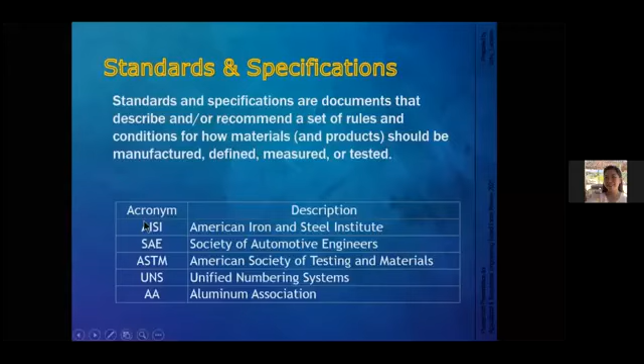Okay, so for the classification of materials, we have already learned that engineering materials can be classified into four types: metals, ceramics, polymers, and composites. The metals are further subdivided into ferrous metals, which means they contain iron, and non-ferrous, which simply means they do not contain iron. For the ceramics, we have crystalline ceramics and glasses. For the polymers, we have thermoplastics, thermosets, and elastomers. Then lastly, the composites, which is simply the combination of the three or any two above, which produces superior properties.

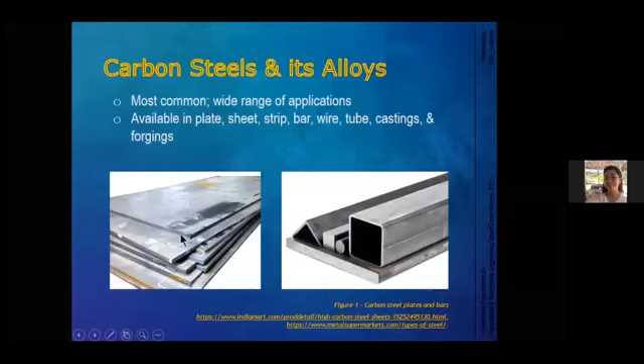Okay, let's talk about the carbon steels and their alloys. Carbon steels and their alloys are the most common and have a wide range of applications. One application, for example, is the body of an automobile; it is a carbon steel metal. Another application is in the construction industry, for example bars, I-beams, or plates. So they're actually the most common. They're available in plate, or sheet if it has a thinner thickness, then strips, bars, wire, tubes, castings, and forgings.

Okay, so what is steel actually? Steel is an alloy. When we say steel, it is a composition of iron and carbon, having a carbon content ranging from 0.15 to 1.7%. Now take note of this range because it actually depends upon the references. Some say it's 0.3, others say the upper value is 2.0 or something. So these are just ranges that depend upon the references.

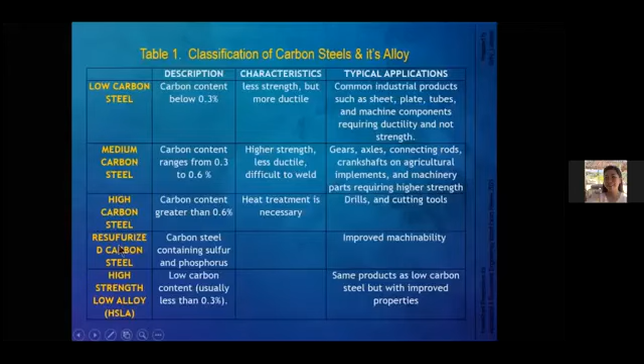Okay, now for this classification of carbon steels and its alloys. In this first column, we have low carbon steel. We have medium carbon steel, high carbon steel, and some alloys right here with some additional elements. It says here containing sulfur and phosphorus. And we also have high strength low alloy steel, or HSLA.

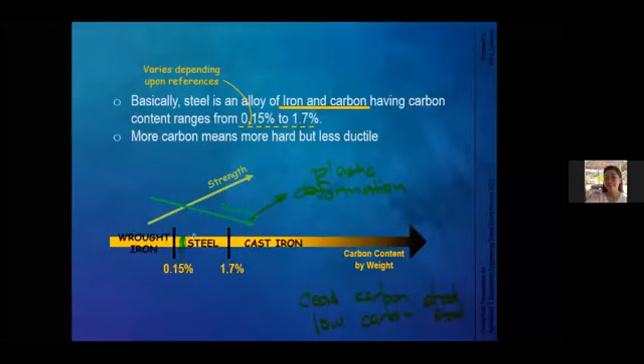Now, what this means is that for a low carbon steel, you have maybe somewhere right here. Okay, again, I have to change my marker. So maybe somewhere here, that's the low carbon steel. And then if you increase the carbon content, then maybe right here, that's our medium carbon steel. And right here, probably you'll have a high carbon steel.

Okay, so we have these characteristics again in terms of strength and ductility. And another thing is that if you increase the carbon content, you're actually making the material difficult to weld. With regard to the typical applications for the low carbon steels, we have machine components requiring ductility and not strength. For medium carbon steel, we have gears, axles, and connecting rods. So these are parts of the machine that require more strength.

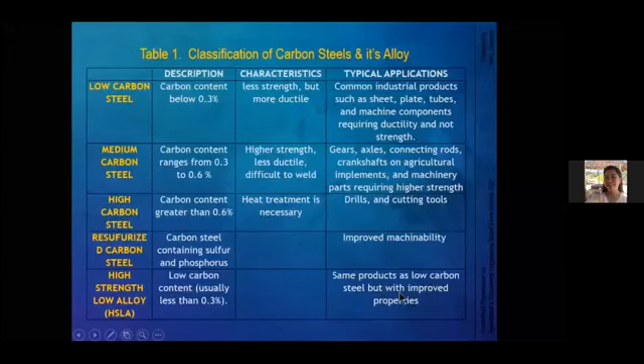And with high carbon steel, we have the drills and cutting tools. So of course, when your application is about drills and cutting tools, you don't want deformation, you don't want ductility. What you want is strength. And then there are still other types of carbon steel alloys that contain other elements to improve the properties. For example, this one says improved machinability. And for HSLA, it says same products as low carbon steel but with improved properties.

Now the second number corresponds to the specific alloy group. So for example, if it's 0, then it is just a plain carbon steel without alloying elements. If it is 1, then it is resulfurized, if it's 2, that's resulfurized and rephosphorized, or 5, it is non-resulfurized with a manganese content of greater than 1.0.

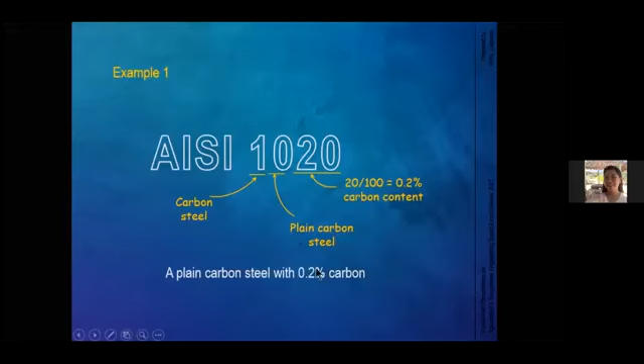Alright, so again, AISI 1020, that's a plain carbon steel with 0.2% carbon. Recall that our carbon content range is something like 0.15 to 1.7% based on our reference. So we are in this range. Okay, another example, AISI 4140.

That's 4, so it means that it's a chromium molybdenum steel. And 1, we have 1% molybdenum. And for the 40, we have 40 divided by 100, that's 0.4% carbon content. So a chromium molybdenum alloy steel containing 0.4% carbon and about 1% of the major alloy molybdenum.

Okay, now another designation is the ASTM, that's the American Society of Testing and Materials. Now this is another standards organization that sets forth standards, and it says here that it's produced in steel mills as standard shapes and used in the construction industry.

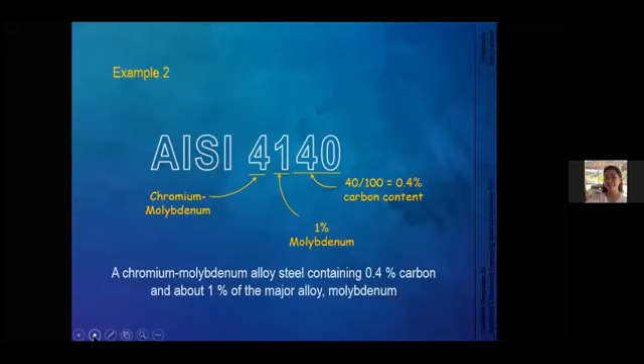Okay, so this is how I remember this. If you see a designation using ASTM, then I usually relate it to the construction industry. But if I see a designation in terms of AISI, then I relate it to the automotive or machinery industry.

Okay so here the designation consists of, in its simplified form, take note this is just in its simplified form, the letter A, which stands for ferrous materials, followed by arbitrary numbers, generally 2 or 3. For example, we have a steel specified or designated as A36. Then we know that this is based on ASTM designation.

For example, we have A325M. If there's an M, then that denotes metric. Now for the A36, this is actually the typical designation for steel bars. And this one, A325M, that's the typical designation for bolts.

I guess I have to change my marker color. Right, so we have bolts right here, and here we have steel bars, and also plates, and maybe some I-beams.

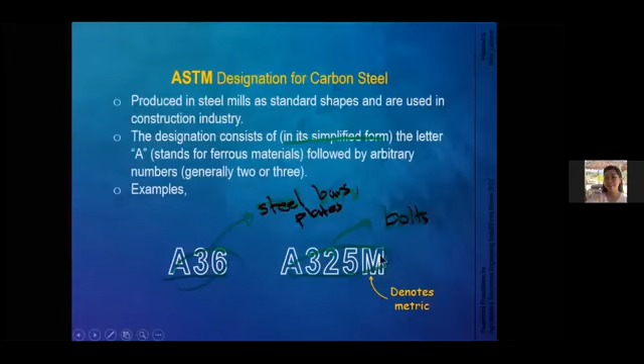Okay, so A36 is material for structural steel plates and some shapes. Yield strength is 36 ksi. So it just happens that for an A36 designated steel, the yield strength is 36 ksi.

Now for A325, the standard material for bolts, at least 105 ksi ultimate strength. Take note, this is ultimate, while the other one is yield strength. And A992, standard material for common I-beams. So the point here is that since you have different numbers, that corresponds to different strengths and properties.

Okay so right here we have a graph taken from the textbook by Richards. Actually the textbook is 'Build with Steel' by Richards, 2011. We have here, for example, an A36, so this is the stress-strain diagram, and we have a steel that's A992, that's for I-beams, and then for bolts we have A325.

So of course this means that if you have longer lengths right here, that just means you are more ductile but less in strength compared to this one, A325. That's, you have higher strength but less ductile. This is high strength, less ductile. And this one is more ductile but weaker.

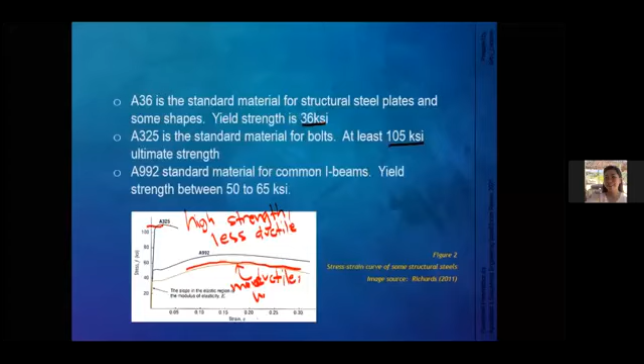Alright, now let's go on to tool and die steels. Now as the name implies, these steels were designed for cutting tools, punches, dies, molds, machinery parts, and similar use. Tool steels are mostly high carbon or high alloy in carbon steel. However, a few types do have low carbon or alloy to give their special properties.

Right, so they have actually more strong than the carbon steel. But of course if you have a stronger material, in terms of this carbon alloy, then of course you have a less ductile material, which is what we need in these applications. So you don't want a tool or a device that deforms easily. Okay, so you want a rigid or a much stronger steel for this application.

Right, now let's go on to the next material, which is stainless steel. Stainless steels are characterized primarily by their corrosion resistance. This is the main characteristic of stainless steel, that's the corrosion resistance.

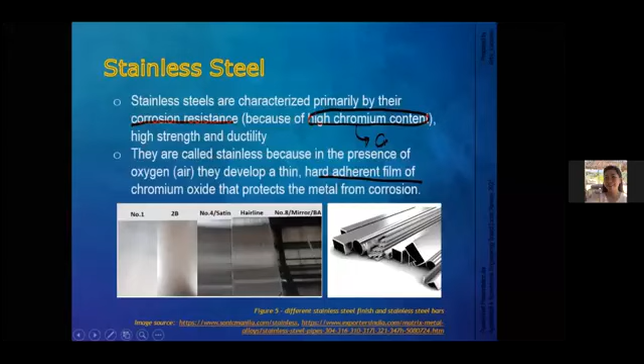corrode. Now right here in this lower left figure, we have the different surface finishes of a stainless steel. So we can have something like a mirror-like finish, or we can have something like a hairline, or maybe something like this, the number 1. Now they are also available in plates or in bars, and many more.

Okay, for the type and designation of stainless steel, we have the AISI designation. Now for the types, you have austenitic, ferritic, martensitic, precipitation hardening stainless steel alloys, and duplex alloys.

Now let's focus on austenitic. In terms of series, because the AISI designation is based on series, we have 200 and 300 series. That's why sometimes when they specify stainless steel, they say, for example, SS304, so that's stainless steel 304. It has corresponding properties, and what's also common is the 202, 200 series, and probably 310.

Now that's 200 and 300 series. The characteristics are moderate strength, non-magnetic, excellent corrosion resistance, and the typical application is general purpose. For 400 series, we have a chromium content up to 27%. It's magnetic and has good corrosion resistance, lower ductility, and the typical applications are non-structural applications.

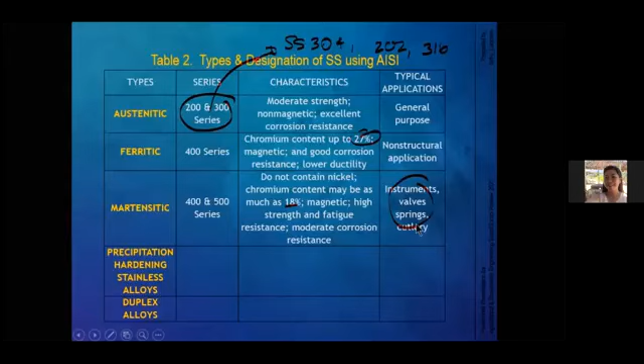Okay, and for the 400 and 500 series, they do not contain nickel. Chromium content may be as much as 18%. They are magnetic, high strength, and fatigue resistant, with moderate corrosion resistance. So typical applications are instruments, valves, springs, cutlery. These are, I think, the kitchen stuff right here.

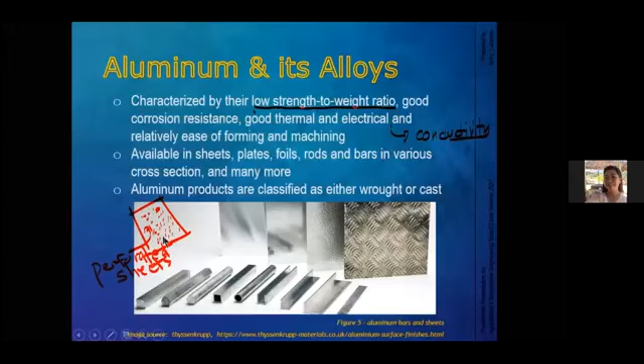Okay, for wrought aluminum, the designation is based on the Aluminum Association, so this is AA, based on aluminum classification. This classification system uses a 4-digit system plus temper designations.

So for example, right here we have 1, then XXX. The first digit refers to the alloy type according to major alloying element, which is similar to carbon steel, because the first digit refers to the type according to major alloying elements. So here, the first one refers to pure aluminum. The second one contains copper, and the third one is manganese, and so on and so forth.

Now, the second digit is the modification to one of the alloying elements, and the last two digits indicate the minimum amount of aluminum alloy. These are arbitrary, except for the 1000 series. So we refer to it as 1000 series, or for example, if it's 2, then that's 2000 series.

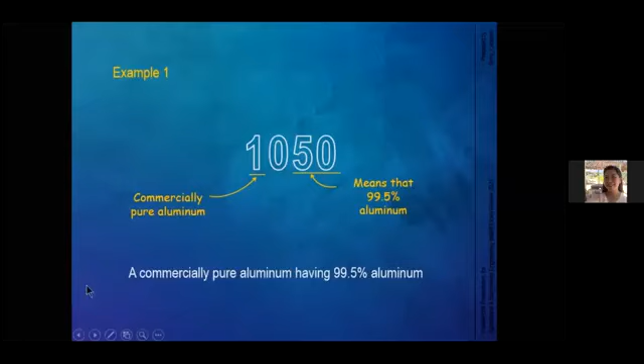Okay, now let's move on to copper and its alloys. Now copper, it says here that pure copper is rarely used for machine parts because of its relatively low strength compared with its alloys. Now, when you say alloys, we were talking about alloys, but we didn't define this yet.

Okay, so alloys are basically composed of two or more metals. Now, for example, steel is an alloy because it is composed of iron and carbon, metals or probably elements.

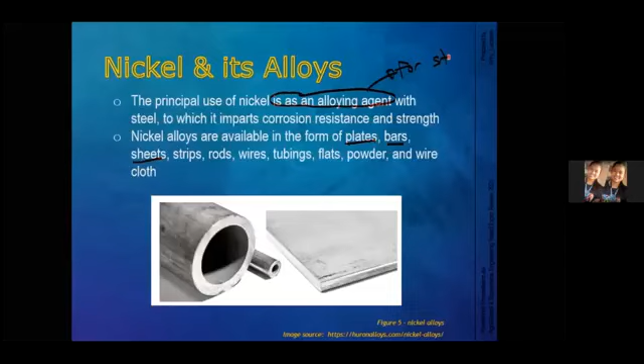Okay, now let's move on to another class. So we were done with the metals, although we haven't discussed all of it, but I think that's enough for this given time. Now for the ceramics and glasses, another class of engineering materials, the main characteristic of this class of material is that they are brittle. So when I say brittle, they break or fracture without undergoing deformation, glass or plastic deformation.

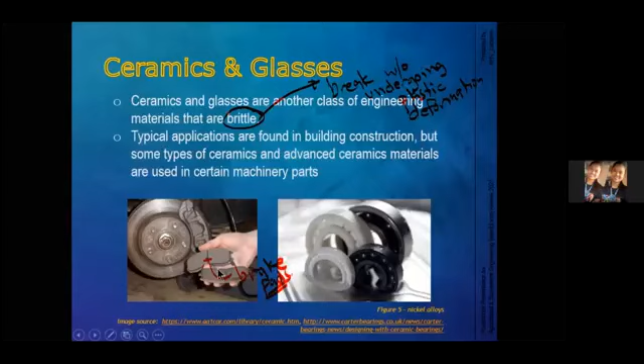Now, typical applications are found in building constructions, for example concrete and glasses, glass windows. But some types of ceramics and advanced ceramics materials are used in certain machinery parts. For example, we have here the brake pads, which are made of, or are a class of ceramic materials. And right here we have a ceramic bearing, ceramic ball bearing. So that is under the ceramic material.

Now we have here, for example, clay. Examples are clay pots and bricks. And for silica, that's the basis for glass products. And alumina and silicon carbide, two abrasive materials used in grinding. Examples are grinding blocks, flattening stones, the ones you use to sharpen your knife. That's alumina and silicon carbide.

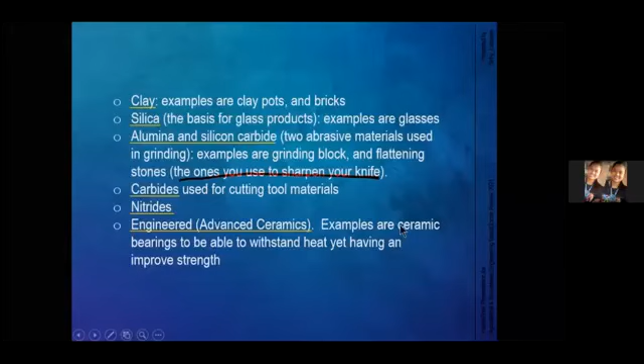Carbides used for cutting tool materials, nitrides, and advanced ceramics or engineered ceramics. An example of this advanced ceramics is this bearing.

Alright, now we'll go on to the polymers and elastomers materials. They are another class of materials that has a wide range of properties. They are actually commonly referred to as plastics. Now, the main advantage, I guess, is that they are easy to shape and probably you can say low cost.

Because, for example, we have here a backpack sprayer. I think the previous designs of this backpack sprayer were made up of stainless steel. Now imagine if you convert that material into plastics, then of course there will be a reduction in weight, plus the manufacturing or fabrication method for plastics is roughly cheaper as compared to welding and seaming and things like that.

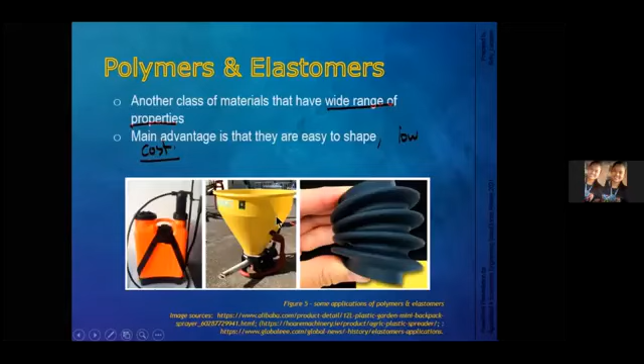resistance to corrosion. And another one here, we have something like a rubber cover for mechanical parts.

Okay, now it says here, polymers can be classified in many ways. So we can classify polymers in terms of its chemistry. You can also classify polymers in terms of its structures and behavior. But in terms of behavior, on why they behave when heated up, they can be divided into three classifications.

First one is thermoplastic polymers. Basically this just means that they are heated, formed, and then cooled in their final shape, and can also be reheated because no chemical bonding occurs. So you can reheat the thermoplastic polymers. But for thermosets, they set in their physical and chemical properties after an initial heat treatment, and therefore they are no longer affected by additional heat exposure.

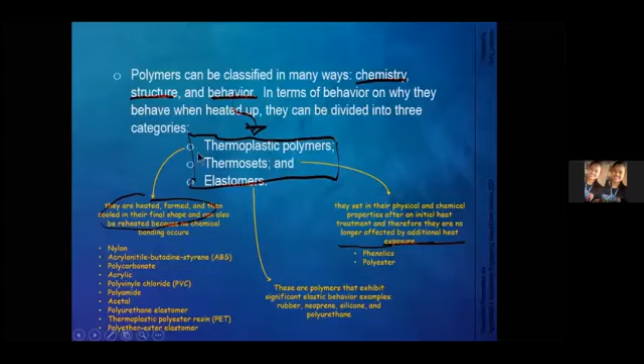So they are more stable compared to thermoplastics, stable in terms of temperature, and of course that depends upon the application. We can say that thermosets are like the rigid version of plastics. Once they are formed, they are set already. Now for thermoplastic polymers, you can reheat them. Examples of thermoplastics include nylon, ABS, polycarbonate, PVC (polyvinyl chloride), polyamide, and many others. For thermosets, we have phenolics and polyesters.

Now the last sub-classification of polymers based on behavior is elastomers. These are polymers that exhibit significant elastic behavior, such as rubber, neoprene, silicone, and polyurethane. Recall from strength of materials that elastic simply means that it goes back to its original shape when the load is taken out. So you apply the load, it deforms, but when you unload that body, it goes back to its original shape. That's the characteristic of rubbers.

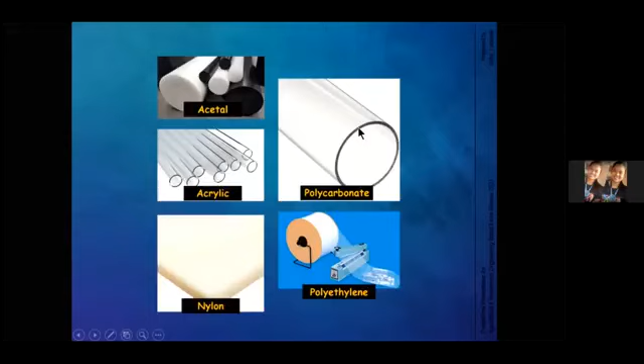Now here we have some examples, for example acetal, acrylic, nylons. They actually occur in many forms.

Alright, now let's go to composites. Composites are another class of material consisting of two or more phases that are processed separately and then bonded together to achieve properties superior to those of its constituents. So it's basically a combination of two or more phases that, when combined, provides a superior property.

For example, here we have a combination of polymers and wood. Because of that, they actually provide a better property than just wood alone. Wood deteriorates in the presence of moisture, whereas if you combine the properties of polymers and wood, you can withstand the deterioration from moisture.

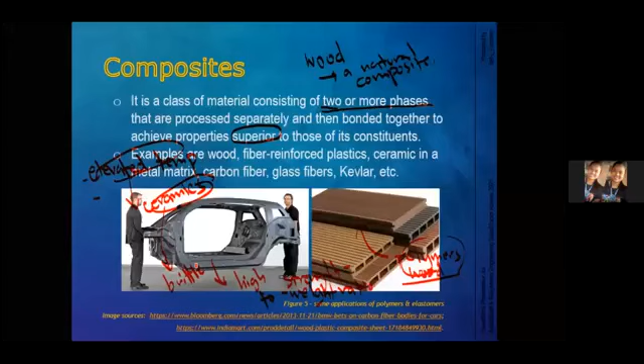Another thing about composites is, for example, in an application where you want elevated temperature resistance - if you want a material that can withstand high temperature, the candidate would be ceramics. However, ceramics is actually brittle. So if you want an application where you need to withstand elevated temperature but also want a ductile material, probably you can mix - some companies actually mix ceramics and metals. Ceramics plus metals - I believe that's called a cermet.

All right, now I guess that's the end of this presentation, and we will now go to the review questions.

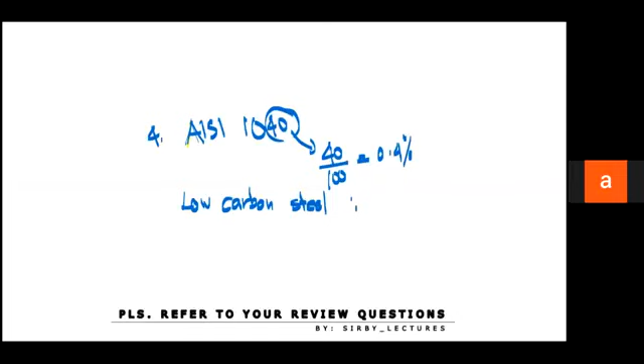Let's write it here: low carbon steel has a range of less than 0.3%. For medium carbon steel, we have 0.3 to 0.6%.

Number 7: a type of carbon steel having greater than 0.6% carbon, so that's high carbon steel. Take note, this should be 0.6%, not 60%. So this is high carbon steel.

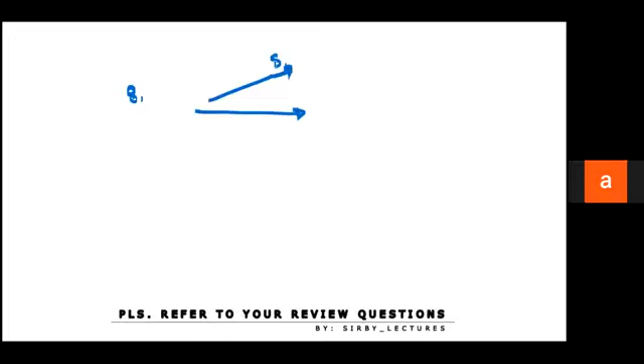Number 8: the higher the carbon content of the steel, the blank it becomes. Recall the carbon line - increasing the carbon means increasing the strength, and increasing the carbon decreases the ductility. So the answer of number 8 is letter C, stronger and more brittle.

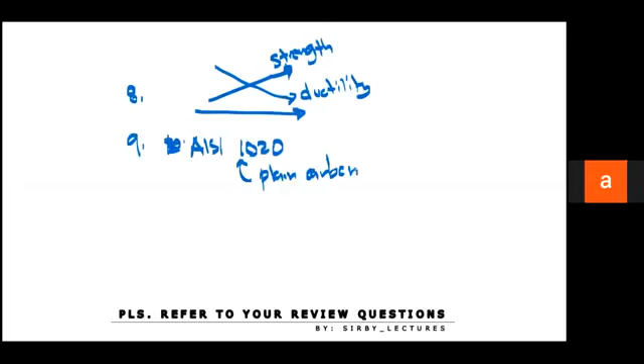Number 9: for agricultural machines, the material used for standard shaft is steel with designation 1020, cold rolled. What is the type of steel used? We have AISI 1020. The number 1 simply means plain carbon steel. So the answer is letter C.

Number 10: what is the percentage of the carbon? Since we have 1020, that's 20 divided by 100, which equals 0.2%.

Number 11: what is the recommended material for the manufacture of pin sleeves and hitch pins for walking type power tillers? This is cold rolled steel. So number 11, that's letter B.

We will be able to describe this further after our next topic on manufacturing processes. Basically, cold rolled steel is an additional process at room temperature wherein you press the materials using two rolls - for example, these rolls and this plate material. It is being pressed, and because of cold rolling, there's a change in the microstructure of the material, making it somehow stronger compared to hot rolled. So the answer is letter B.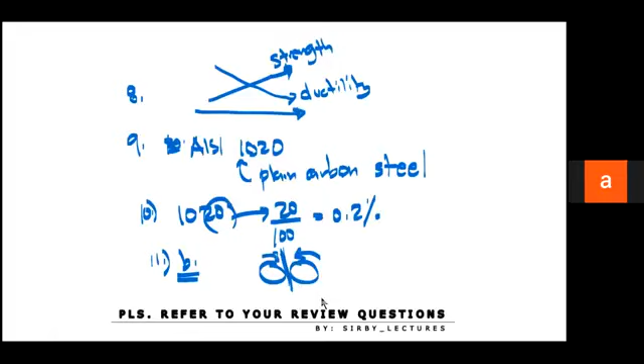Number 12: it is a material commonly used as axle for agricultural machines - that's cold rolled steel shaft.

Number 13: it is a type of steel used for making tractor drawn disc plow bottoms. We have tool steel, soft center steel, molybdenum steel, and none of the above. The answer for number 13 is letter B, soft centered steel. It's under a manufacturing process where the center is softer compared to the outside surfaces.

Number 14: steel bars commonly used in the manufacture of agricultural machines. The answer is B, that's mild steel.

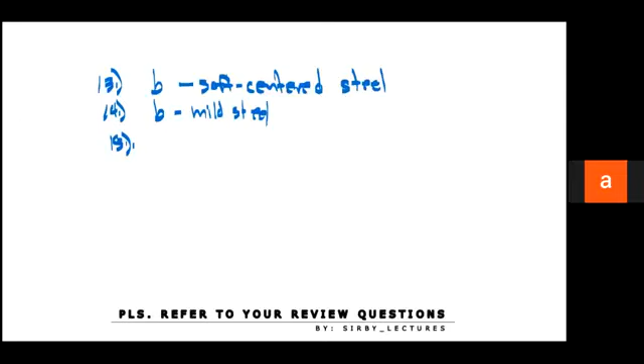Number 15: it is a type of steel used in turning machines for cutting metals. The answer is letter C, tool steel.

Number 16: it is a type of steel commonly used as a peg tooth for axial flow rice thresher. The answer is letter D, which is cold rolled steel. So why do we need this cold rolled steel? We can use the acronym CRS, cold rolled steel.

Okay, because although we need a strong material, we also need the weldability property as well. Okay, as compared to tool steel, that would be difficult to weld.

Okay, number 17. In number 17, the required material designation for the construction of gear based on PAES standards. So this is based on PAES. That's letter B. It says AISI 1045.

Okay, number 18, the type of steel used in the manufacture of disc plows and disc blades for harrows. The answer is letter C. That's AISI 1080. Okay, so this can be found in our past

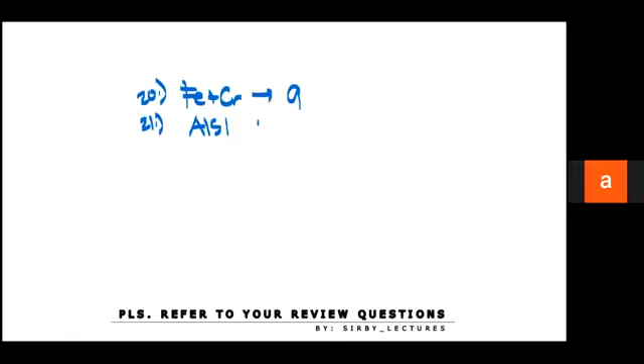Number 21. If the stainless steel used in a banana chipper is designated as 316, the designation is under... So the most common designation for stainless steels is based on AISI. So that's 300 series, and the answer is letter B.

Okay, number 22, it is the series of stainless steel that are non-magnetic and have excellent corrosion resistance but are susceptible to stress corrosion cracking. The answer is letter A, austenitic.

Number 23, it is the series of stainless steel having high chromium content. Okay, having high chromium content up to 27%. The answer is letter B. That's the 400 series. Ferritic.

Number 24. These are types of stainless steels typically used for cutlery, surgical tools, instruments, valves, and springs. The answer is 400 series. But although 400 series, that should be martensitic. C. Martensitic. Right, and that's 400 or 500 series.

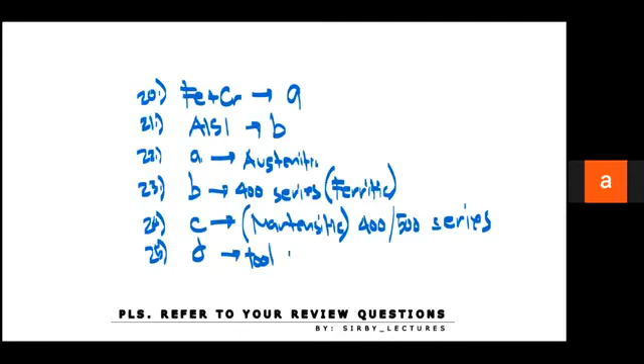Okay, number 25. These are types of materials designed for high strength, impact toughness, and wear resistance at room and elevated temperature, commonly used in forming and machining of metals. The answer is letter D. That's tool and die steel.

In number 26, which of the following metals is the strongest? We have tool steel, spring steel, stainless steel, all of the above. So the hardest is tool steel, letter A. Okay, number 27.

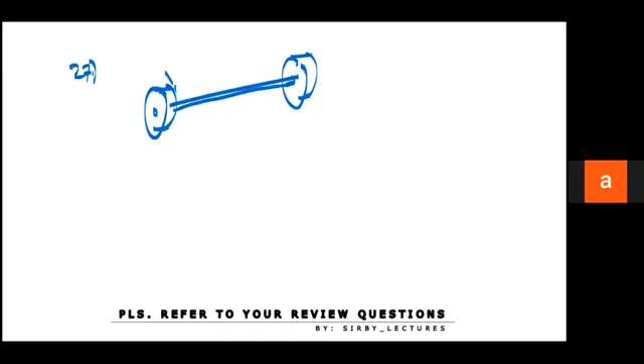So for number 27, it is a type of steel used as a shock absorber attached to the wheel and to the thresher support frame in mobilized thresher. This shock absorber looks like this. For example, this is our wheel. This is our axle. So somewhere right here, there is something like this. So there's actually a spring.

It's called a leaf spring, right? So there are layers of leaf spring over here. If we try to look at the side view, this is our wheel. Then we have something like this. So we have leaf spring right here, and the material used in here is called spring steel.

Okay, number 28. It's a class of ferrous alloys with carbon contents above 2.14%. The answer is cast iron, letter C. Number 29. It is a material characterized by high strength-to-weight ratio, high thermal and electrical conductivity, good corrosion resistance, and good manufacturing properties. The hint here is the high strength-to-weight ratio, and that is attributed to aluminum.

Number 30. Which of the following wrought aluminum series corresponds to commercially pure aluminum? So recall our designation for aluminum, and the 1000 series corresponds to the commercially pure aluminum.

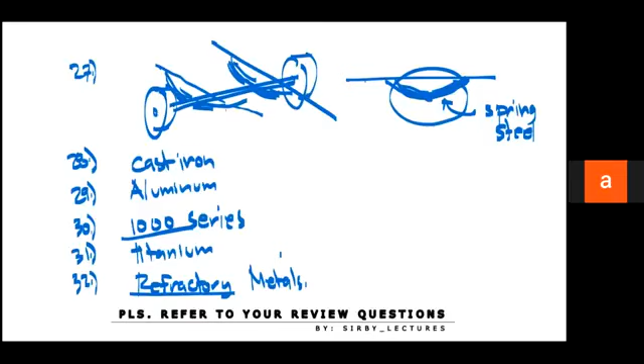For number 32, it is a material characterized primarily by high strength at elevated temperatures, composed of molybdenum, niobium, tungsten, and tantalum. So these are refractory metals. From the word refractory, I think it can be related to the elevated temperature. Okay, number 33.

It is an alloy of copper and tin. That's bronze, right? Number 34, it is an alloy of copper and zinc. The answer is brass. Okay, number 35. It is an alloy of nickel, molybdenum, and chromium. So this is a nickel alloy. The answer is letter C, Hastelloy.

Number 36. For number 36, it is an alloy of tin, copper, and antimony. The answer is letter D, pewter. Okay, next is number 37. For number 37, they are substances that melt on heating and are processed in the melted state by a variety of extrusion and molding processes. Okay, that melt on heating. So this is thermoplastics.

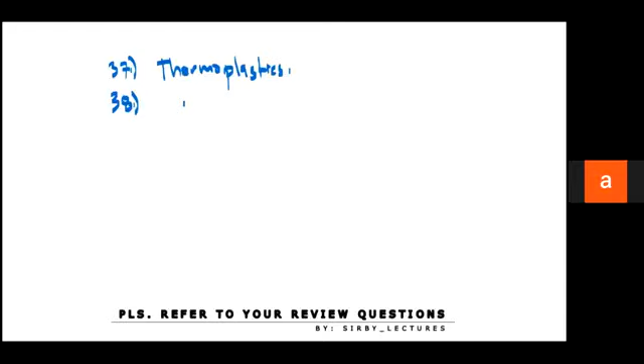Number 38. They are substances that cannot be melted and remelted. If you recall our discussion, that's thermosets. So it has a stable characteristic in higher temperature than the thermoplastics. Number 39, it is the temperature which the plastic can withstand without incurring a change in its physical properties. And the answer is service temperature.

Okay, now I think you should refer to PAES regarding this engineering of plastics. I'm not sure about the PAES number right here, but anyway, you can just find it in volume number 3. Okay, number 40, which of the following is not considered as an engineering plastic? The answer is letter E, none of the above, because they are all plastics. 41, polyamide is one of the most versatile and widely used thermoplastic materials. It is also known as nylon.

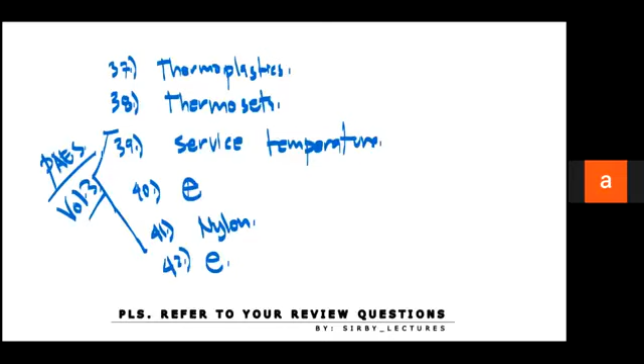And number 42, which of the following does not belong to the group? Wood, ceramic, carbon fiber, fiber reinforced plastics. They are all composites. So the answer is letter E. Now again, you can find the definition about nylon and other polymer stuff in PAES volume 3. Just not sure about the PAES numbers. Anyways, that's all for these review questions. Now we'll move on to our next topic, which is manufacturing processes.

So, meron po bang questions so far? Sige po. If no questions po, then I'll play yung next natin na topic, which is manufacturing processes. Do you have questions? None? Nakatulog na ata. None po. Okay. How about you, Jerome? Tahimik ka ata. Oh, naka-mute. You can raise hand kung gusto niyo magsalita. Okay, sir. Parang wala naman pong questions. Let's proceed na po with the next topic.

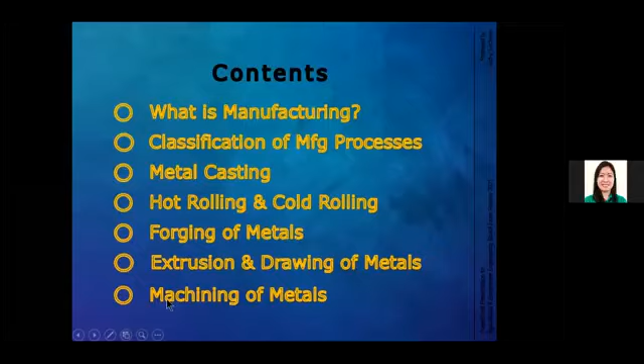This is our second topic for the review course in machine design. The title of this topic is manufacturing processes. For the contents of this presentation, we'll first discuss what is manufacturing, and then we'll have a classification, something like an organizational chart regarding the manufacturing process. And then after that, we'll have detailed discussions regarding the different processes such as metal casting, hot rolling, and cold rolling. If you remember earlier, we mentioned cold rolled steel, so here we'll have detailed discussions about that. And machining of metals and many more, since there are a lot of processes.

Okay, what is manufacturing? According to Groover 2015, manufacturing can be defined technologically as the application of physical and chemical processes to alter the geometry, the properties, and or appearance of a given starting material to make parts or products. For example, we have a solid shaft right here, and we want to make a step shaft. How do you make a step shaft out of this plain solid shaft? Of course, you have to undergo milling operations. So the alteration of geometry, and for some processes, it also alters the properties, and that's the definition of manufacturing.

Now, another definition of manufacturing is in terms of economics. In terms of economics, manufacturing is the transformation of materials into items of greater value by means of one or more processing and or assembly operations. So from this state or condition, you did some processing operations to improve the value. So in the end, you have a greater value product.

Now, hot rolling and cold rolling. You have already encountered this in the previous lecture. Rolling is a deformation process in which the thickness of the work is reduced by compressive forces exerted by two opposing rolls. So we have roll number 1 and roll number 2, and your material is in between.

Hot rolling simply means rolling at elevated temperature, for example in the lower left, and cold rolling refers to rolling at room temperature, here in the lower right. It doesn't mean that cold rolling has to be at some freezing temperature. Any temperature within the room temperature interval is classified as cold rolling.

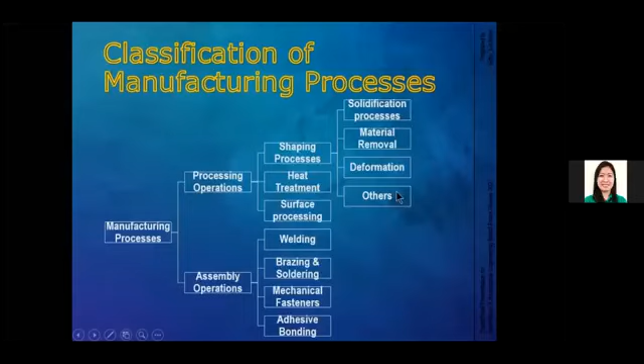And there's an effect in the microstructure of the metal when you undergo hot rolling or cold rolling. By the way, you would notice that our detailed discussions are not named according to these classifications, simply because it's much more common to encounter terms like metal casting rather than deformation process or solidification process. That's why I decided to use these common terms. Okay, so hot rolling.

In terms of properties, cold rolled steel has a smoother surface as compared to the hot rolled sheet. Plus, it is much stronger as compared to the hot rolled sheets.

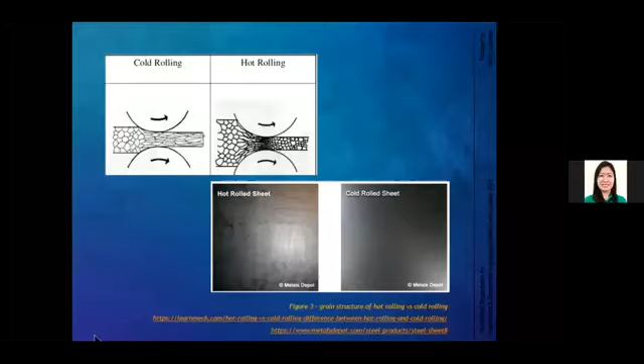All right, now let's move on to forging of metals. Forging simply means a forming and shaping process for metals through the use of hammering, pressing, or rolling. Typical forged products are bolts and rivets, connecting rods, shafts of turbines, and gears. In historic times, we see this type of process in the movies.

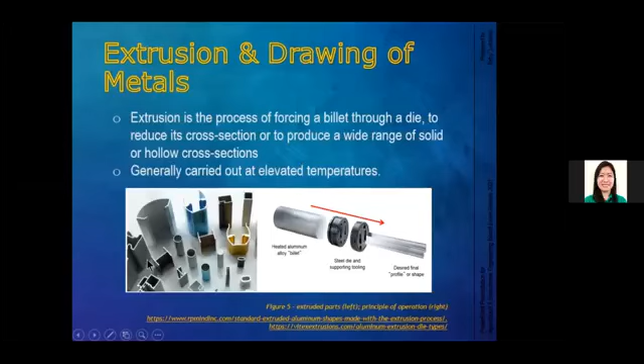Okay, next topic: machining of metals. Machining operation is a material removal process in which excess material is removed to achieve the desired geometry. So here we have, I think, grooving of shafts or making some parts that's complex. So you can do it by machining, and it's actually precise. Machining process is a precise process.

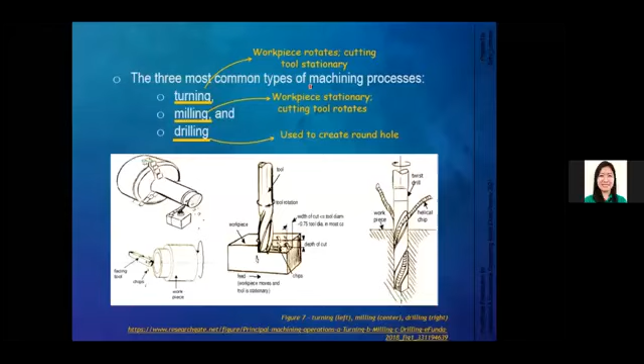The three most common types of machining process are turning, milling, and drilling. Now the difference between the three is, let me explain this first. When you say machining, you must think about a cutting tool. There must be a cutting tool, number one, and number two, there must be a workpiece, right?

This is our workpiece. So when you say turning, the workpiece rotates while the cutting tool is stationary. So in this case, this is our workpiece, and it's being held by this jaw, something like a holder, and this is our cutting tool. So this workpiece rotates, and this is our cutting tool.

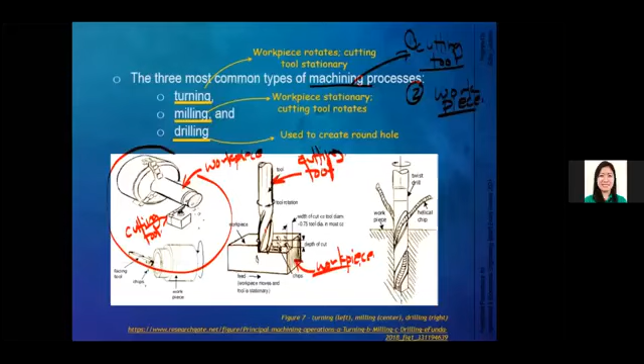Okay, and for milling, the opposite is what is going on. So for milling, the workpiece is stationary, but the cutting tool rotates. So this is our workpiece, stationary with respect to this cutting tool. So this one rotates, and as it rotates, because it has some specially formed blades, it somehow chips off the materials, thereby removing some material. So this one rotates and this one is stationary.

And when you say drilling, it is used to create a round hole. It's related to milling as well, except that the function is to create a round hole.

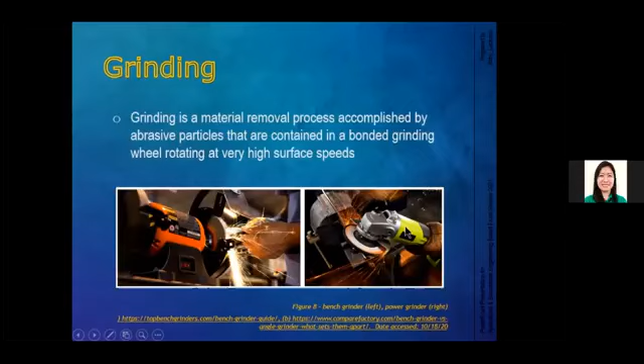Another one, grinding. Grinding is a material removal process accomplished by abrasive particles that are contained in a bonded grinding wheel rotating at very high surface speeds. For example, we have a bench grinder, used to remove some surface roughness. So for example, you want to smoothen the surface, then that's the grinding process. And here in our lower right figure, we have a power grinder.

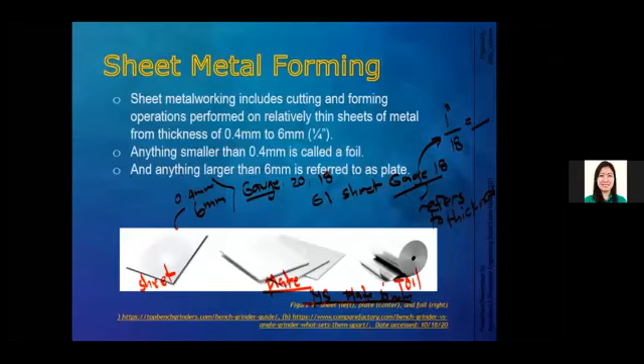Okay, so for example, MS plate 10 mm, mild steel plate. Let's write it here: MS plate, 10 mm. So that's mild steel, or a low carbon steel. I think another name for low carbon steel is mild steel. Mild steel plate, and the thickness is 10 mm.

The next one is blow molding. For blow molding, it's something like injection molding, except that you are introducing air right here. You are blowing air inside, and that's the reason why this bottle container is being shaped like that. Okay, so that's the blow molding process.

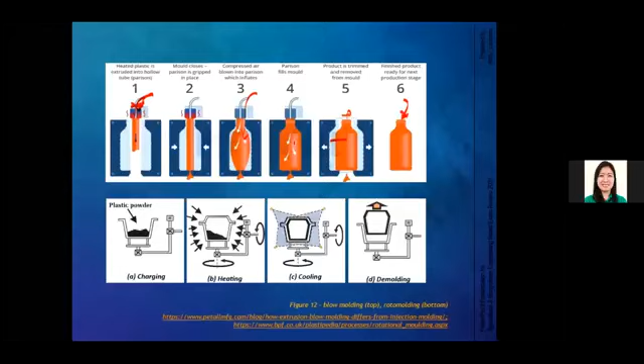So you feed the plastic pellets or parisons first, and then after feeding you introduce the air, and because of that air, it presses the plastic into the surface. And if you remove the mold, then you can have this final shape.

The next one is rotomolding. Now, rotomolding, think about rotation. So we have this container right here, let's say cylindrical or tapered or something like that. The first step is to fill this container with pellets, that's charging. After filling this container with pellets, then you have to enclose it, and you have to heat the device.

Because of elevated temperatures, these plastic pellets will melt, and you combine that with rotation. So this one rotates as well, so I guess you have a 2-axis rotation. In that way, because of the rotation, the plastic will stick into the surface because of centrifugal force.

Okay, so once done, you have to reduce the temperature. It's being cooled down, and then afterwards, if you remove the mold, you can have this shape. These are common in large containers.

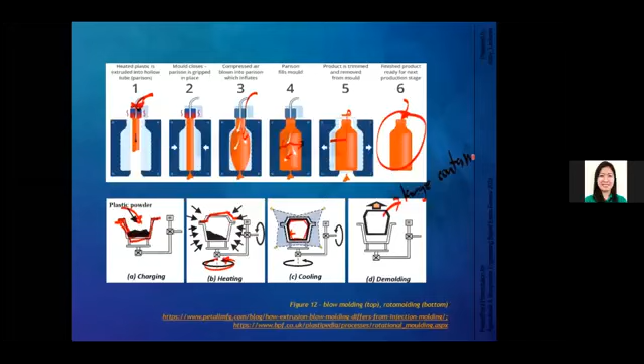Okay, next one is heat treatment. Heat treatment is a process in which a metal is heated to an elevated temperature, from which it is cooled very rapidly. So we have heating, and we are going to cool it very rapidly. In the process, the metal somehow gets harder and stronger.

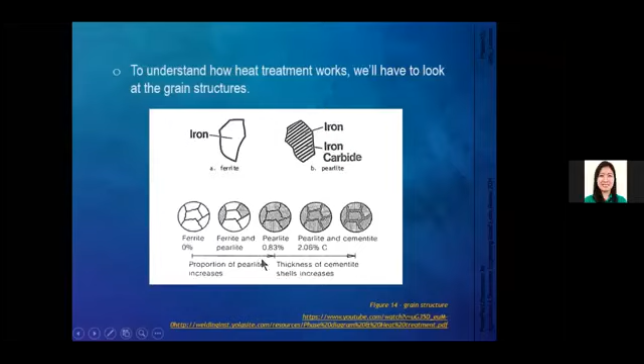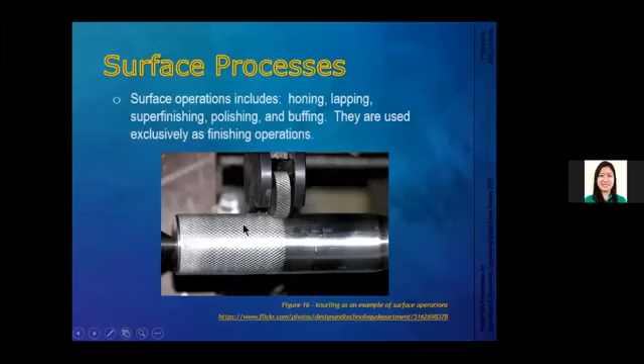Now let's move on to the surface processes. The surface operations include honing, lapping, super finishing, polishing, and buffing. The figure right here, as shown, is the knurling process. You are making some grid lines here, just for grips, for example.

Okay, now let's move on to the joining process. The joints can be classified as either permanent or non-permanent. When I say a permanent joint, it is one that when disassembling will cause unrepairable damage to the base metal or to the joint itself. So for example, this is our joint. Now if I want to disassemble this, I have to break this joint, or I have to break the base metal. This is our base material. If I damage either one of these, then that's called a permanent joint.

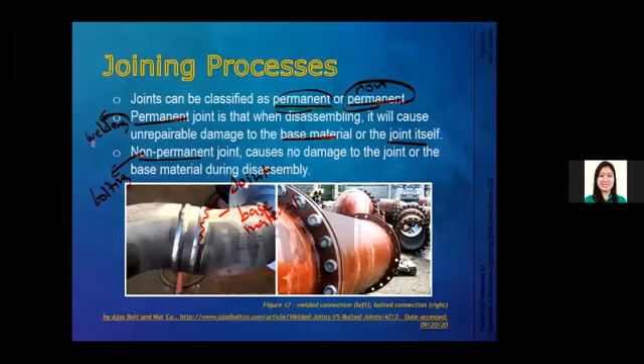Now, if during disassembly I don't damage the base material or the joint, then that joint is non-permanent. An example of a non-permanent joint is bolting. This one, a permanent joint, an example is welding, and probably bonding or adhesive bonding. So mechanical fasteners fall into this non-permanent joint category—there's a lot of mechanical fasteners out there, combinations of bolts and nuts, screws.

By the way, what's the difference? Let me ask you a question. What's the difference between a bolt and a screw? Right, so that's the million dollar question. What's the difference between a bolt and a screw?

Okay, so if I draw here, say we have something like this, and we'll have a threaded portion all throughout the length, and let's draw another fastener here, also threaded all the way throughout its length, and let's call this one bolt, and this one screw. Now, what is the difference? Let's say this is hex head, and this one is also hex head. This one is also hex head, but I call this screw, and this one I call bolt. Now, what's the difference?

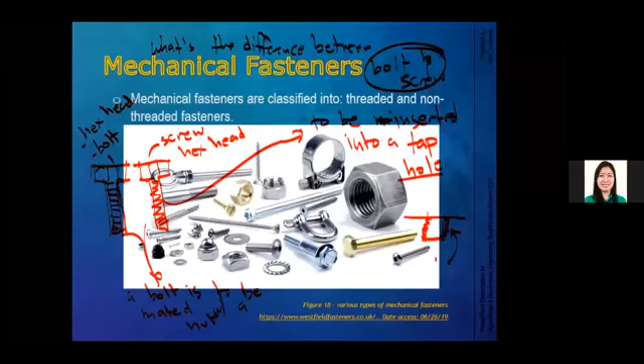Okay, the difference is: a bolt is to be mated with a nut. Whereas this one, the screw, is to be mated, or I think the right term is inserted, into a tap hole. So when we say tap hole, for example, we have a cross section right here, and I drill a hole, but I drill it with a thread, or having a thread. So that's what you call a tap hole, or let's call this a hole with threads.

Alright, so that's the meaning of the tap hole.

So right here we have this screw. Even though a screw and a hex head bolt may have the same head, the distinction is in the intention: if you're going to mate it with a nut, that's a bolt, but if you're going to insert it into a tap hole, a threaded hole, then that's a screw. Because they can have the same geometry, sometimes a nut can be fitted onto a screw, but the main difference is that the screw should go into a tap hole while the bolt should be mated with a nut.

And here we have a stud and a nut. A stud is basically a threaded fastener, entirely threaded, and it has no head, just a tip point. But if it's long enough, like a rod, we can just call it a threaded rod. This one is a threaded rod, and you have a nut here, plus another nut right here.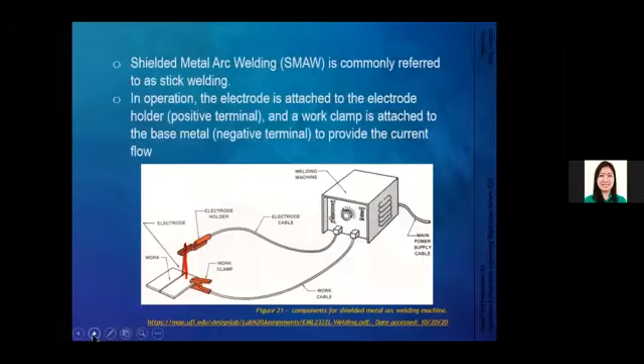Why stick welding? Because you have this stick right here, the electrode. In operation, the electrode is attached to the electrode holder. You have this holder, and you have this clamp, a work clamp, which is attached to the base metal to provide the current flow. The electrode, also known as the welding rod, is a consumable part of the shielded metal arc welding process.

So we have different types of this welding electrode. For example, here we see 6011, here we have 6013, and this one is 7014. So what is the meaning of all this?

Now here we have, for example, it is designated as E6011 or E7018. The E stands for electrode, and the first two digits refer to the tensile strength in KSI.

Tensile strength in KSI. Now, I think this is the tensile strength of the joint. I should say it's the tensile strength of the joint, assuming that we did a proper welding procedure.

So that's the joint. Now, for example, we have a base metal, let's say a mild steel plate or a flat bar, right here. Let's say I have to attach another flat bar right here, and therefore I have to weld this portion.

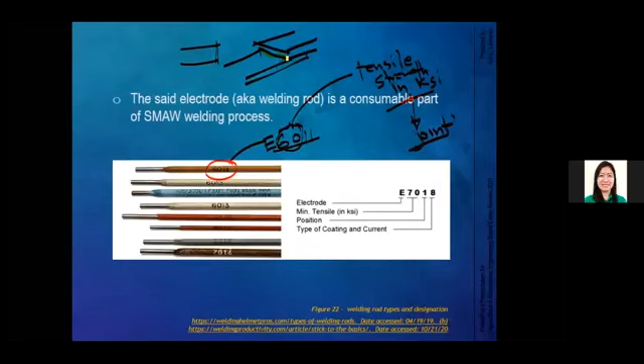So if I have to weld this portion, recall that if this is a mild steel bar or plate, we have 36 KSI, A36. And the joint here says we have 60 KSI. So the joint is always stronger than the base metal, assuming we did a proper welding job. But if we didn't do a good welding job, then it will just rip off. So this number refers to the tensile strength of the joint.

And the third digit corresponds to the welding position. If I remember correctly, when you have a number 1 position, that's the all-position type. In other words, you can have flat, horizontal, vertical, plus overhead positions.

Okay, so when you say flat position, it's actually hard to draw right here. For example, this is our plate, and that's in 3D, and this is our joint. Now let's say this is our X, Y, Z.

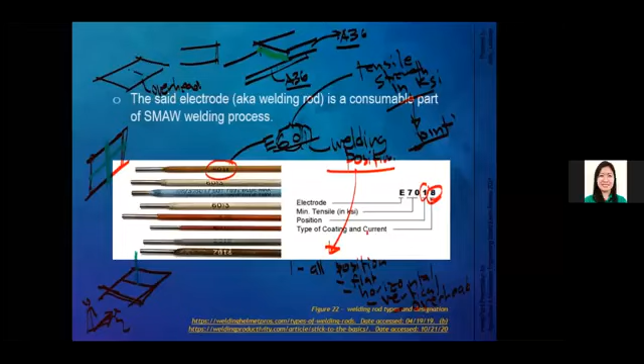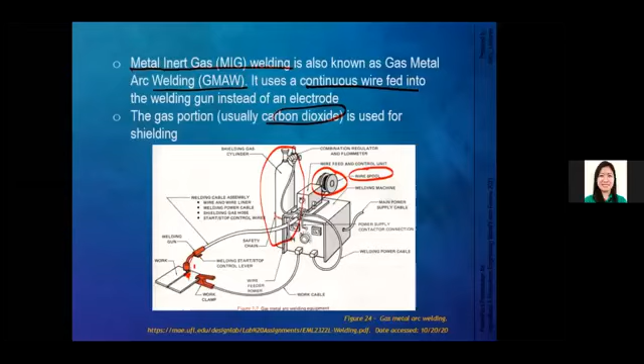And we have a shielding gas, which is usually carbon dioxide, used for shielding. So there's also another passageway for the carbon dioxide.

Another one, oxyacetylene, burns acetylene gas to generate a torch that can be used for welding. Take note, it can be used for welding, brazing, or even cutting all types of metals by changing out the attachment or tips. These are the tips.

Now, another million dollar question. We have a smaller tank, and we have a taller tank. We have a taller but thinner or narrower tank, and here a fatter tank but smaller in terms of height. So the question is, which one is oxygen and which one is the acetylene? Which one is the oxygen, is it one, or is it this, is it two?

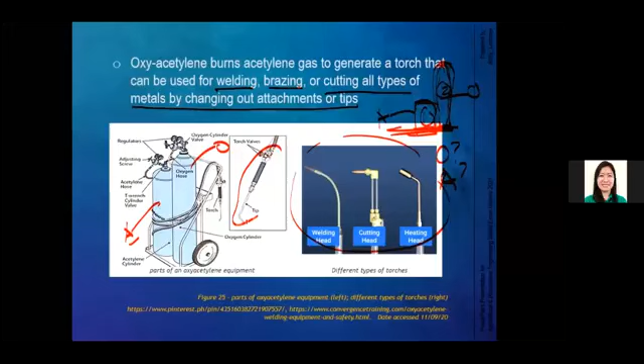Okay, so the answer is the oxygen is the tallest tank, and the smallest tank is the acetylene. So right here, this is oxygen, this is acetylene. They all have these valves right here, and then they mix together somehow in this torch. Depending upon the torch, you can have a welding head, a cutting head, or a heating head. So this is some close-up view regarding this torch head.

Now let's move on to brazing and soldering. Soldering and brazing are closely related processes in which metal components are joined together by means of a filler metal. The filler metal, which has a melting point lower than that of the base metal, is introduced to the heated joint. So right here at the lower left we have brazing, and at the lower right we have soldering, which is a typical process for the electronics industry. Here, which is typical in the refrigeration industry, it uses a filler metal.

Now the last one we have adhesive bonding. Many components and products can be joined and assembled by the use of an adhesive rather than by one of the joining methods described thus far. So basically it's just glue. When I say adhesive bonding, you can combine various parts by using glue. There are several forms: it can be a liquid, a paste, solution, emulsion, powder, tape, or film. The design actually depends upon how you applied the adhesives, whether the loading is in shear, tension, peel, or something like that. So you have to take those things into consideration. Now another one right here, probably the most common, it can actually join even rubber, leather, or metals, or various materials.

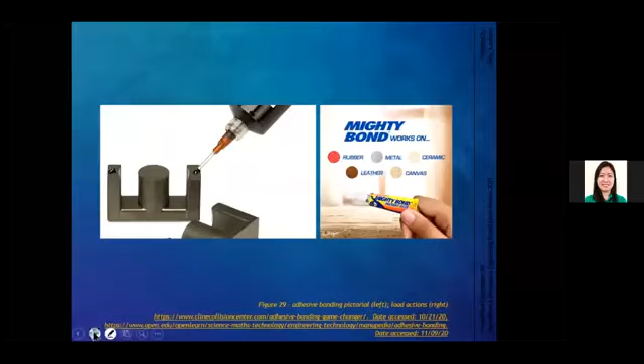Okay, now we're almost done, and right now we'll move on to the review questions.

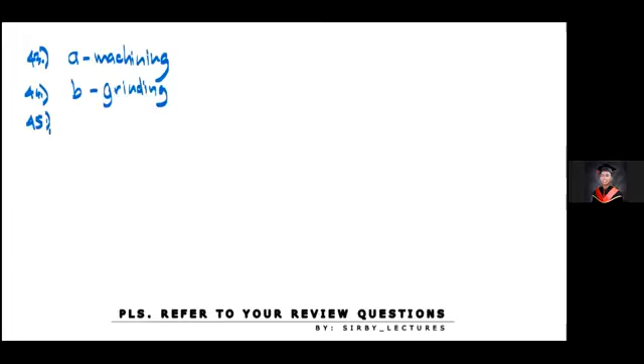Okay, number 44. It is a material removal process that uses an individual abrasive grain as the cutting tool. We have letter B, that's grinding. The key word right here is the abrasive grain. Number 45. It is a deformation process in which the thickness of the work is reduced by compressive forces exerted by two opposing rolls. The answer is letter C, right, rolling.

Number 46. It is a deformation process in which the work is compressed between two dies using either impact or gradual pressure to form the part. Okay, so the keyword right here, we have a deformation process, and either by impact or gradual pressure to form the part, that's forging, letter D. Number 47. Now, in manufacturing, it is defined as the straining of the metal around a straight axis. The answer is letter C, bending.

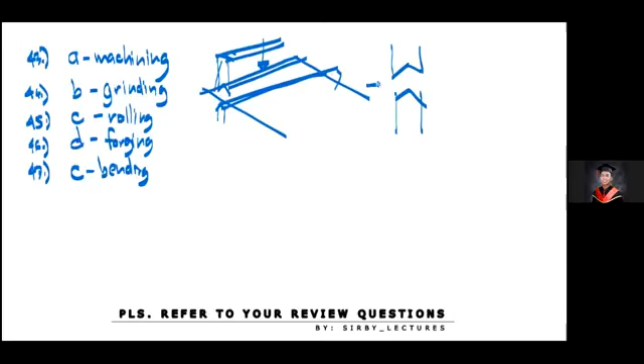So for example, we have right here our V bender, and if this is our metal plate, okay, it's very hard to draw here. We have this top portion that goes downward. So if we try to look at the side view, we have something like this. We have this bottom part and we have this top part, and this is our plate. So of course, when this goes down, you will have a bent shape, right? And right here, this is the straining portion. Okay, straining portion.

Okay, number 48. It is a process in which molten material flows by gravity or other force into a mold where it solidifies in the shape of the mold cavity. The answer is casting. Number 49. It is a general term that refers to the process of heating a material to change its physical properties. This heating and eventual cooling to room temperature either softens or hardens the metals. The answer is A. That's heat treatment.

Okay, number 50. It is the first step. Okay, so the first step is letter A. That's austenitizing. So you are bringing this ferrite structure into an austenitic structure. So it's also termed as austenitizing. And the second step, right? So we first increase the temperature, right? And then the second step goes down. So this first step, this is the austenitizing.

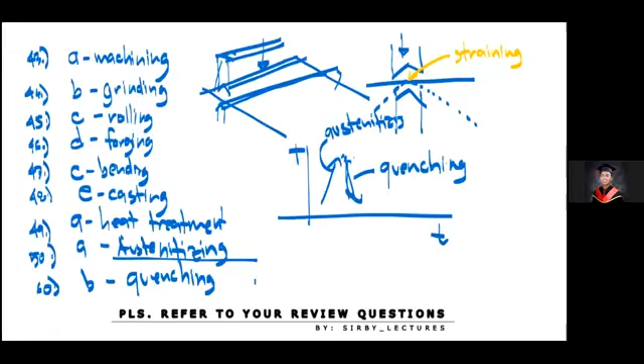Okay, number 52, which of the following is used as quenching media for heat treatment? The answer is all of the above. Number 52, we have all of the above. Number 53.

Okay, number 53, it is a process of reheating the hardened steel to much lower temperature. So if we have austenitizing, and then we have another process like quenching, and then we increase again, but at a much lower temperature. Then this one is termed as tempering, letter C. So that's tempering.

Number 54, which of the following is considered as softening process for heat treatment? The answer is all of the above, letter D.

And number 55, it is a hardening process of heat treatment by diffusing carbon or nitrogen into the surface at an elevated temperature and then cooled at a rate sufficient to harden the surface. So this is letter A, case hardening. So in this way, you are just actually hardening the outer surface.

Okay, number 56. It is a shaping process for plastics where the material is compressed or forced to flow through a die orifice to provide long continuous product whose cross-sectional shape is determined by the shape of the orifice. Okay, the answer is letter A.

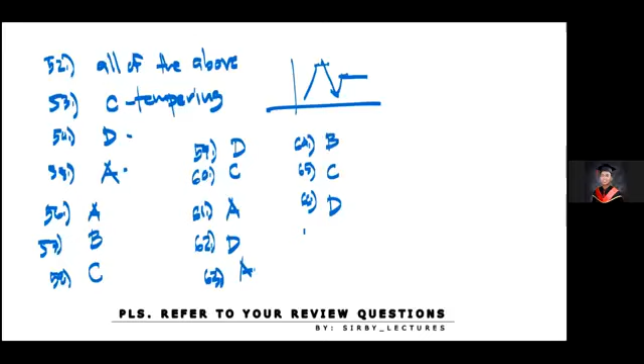Okay, number 65, which of the following welding methods uses argon gas as cooling element? This is TIG welding, letter C. Number 66, which of the following welding methods uses fuel gas combined with oxygen to produce flame? The answer is letter D. Number 67, in oxyacetylene welding, the shorter but larger diameter storage tank is for? Okay, this was the $1 million question. This is acetylene, letter B.

Number 68, in oxyacetylene welding, the taller but smaller diameter storage tank is for oxygen. Number 69, the full pressure of the oxygen cylinder in oxyacetylene welding is, okay, so you just have to memorize this one, 2,200 PSI.

Number 70, it is a component of an oxyacetylene welding equipment used to mix the oxygen and the acetylene. So if we want to mix the acetylene and the oxygen, the device is called, okay, torch. That's letter B. Now, the hose is simply a passageway, and the regulator is simply something like a valve. But the device that mixes is the torch.

Okay, number 71. In oxyacetylene welding, if the mixture of oxygen is too much for the acetylene, it will provide oxidation flame. Number 72. If the mixture of acetylene is too much for the oxygen, then it will have a carbonizing flame. So it's basically a rich and lean mixture. Now, number 73, which of the following positions is not possible for shielded metal arc welding? The answer is none of the above. Letter E.